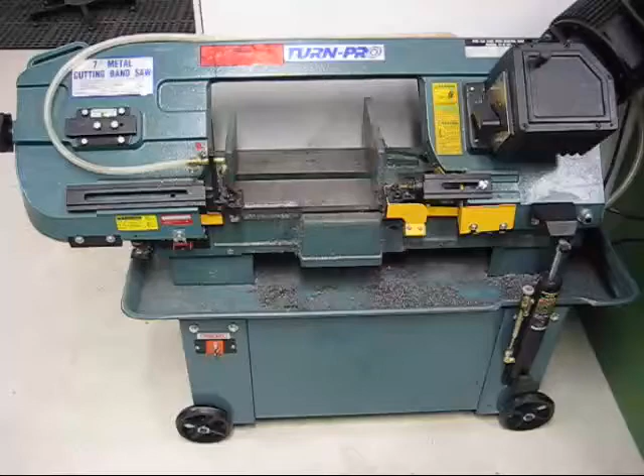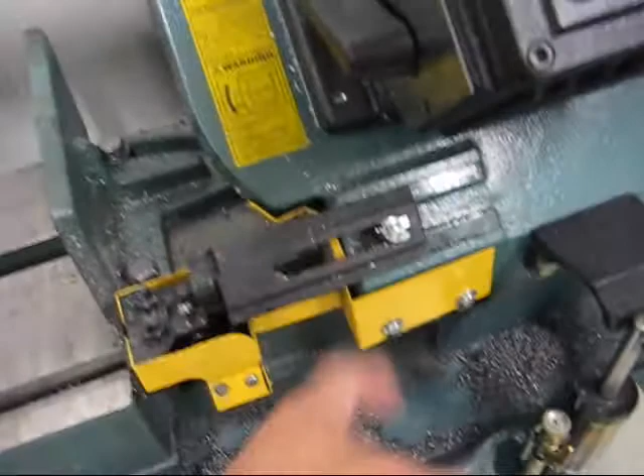Today's project is to repair this bandsaw. This hand wheel here tightens the adjustment on the cutting length. It's broken, it's just plastic.

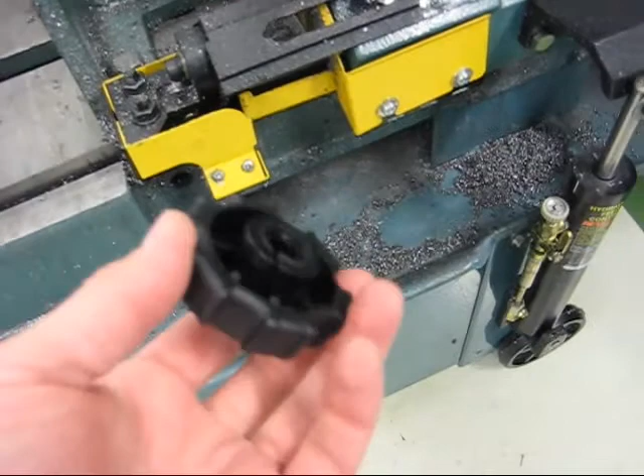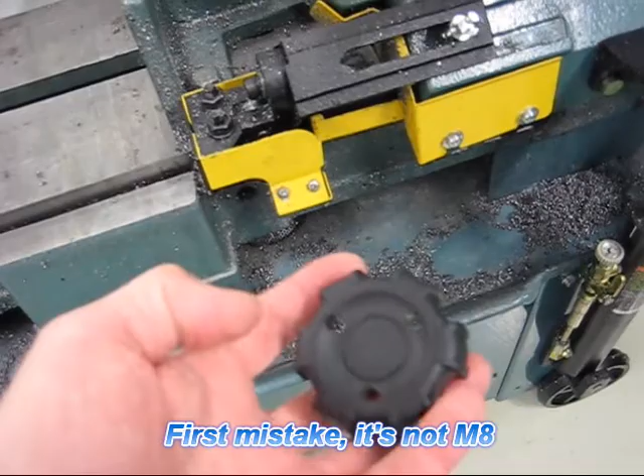I'll take another one off to measure it. So I'm going to make two new ones out of aluminium, and I'm going to use an M8 bolt socketed cap screw for it instead of making the threads and everything out of aluminium. I don't think that will hold up.

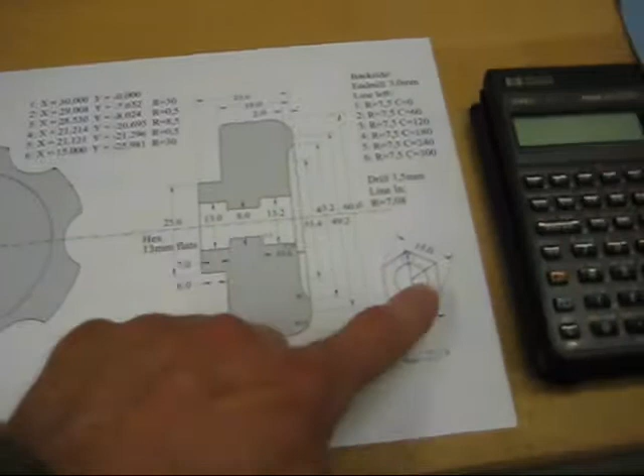I've made a little design here on how it's going to look. I'm going to mill a hex on the back side, where I'll insert a nut, then the socketed cap screw from this side, and I'll Loctite that onto the screw, hopefully it will stick.

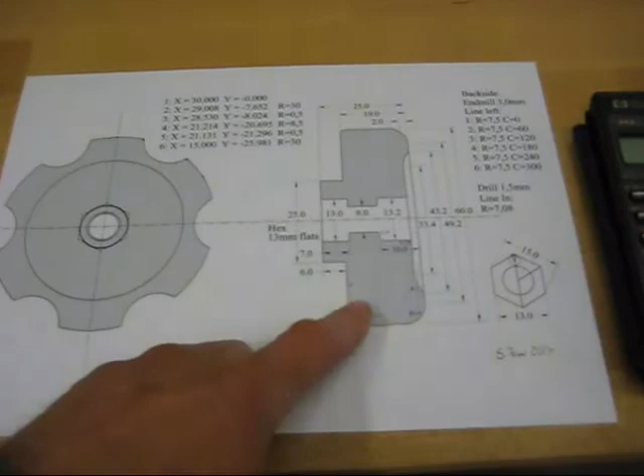I will turn that piece in the CNC machine, just because it will be faster, especially with these radiuses.

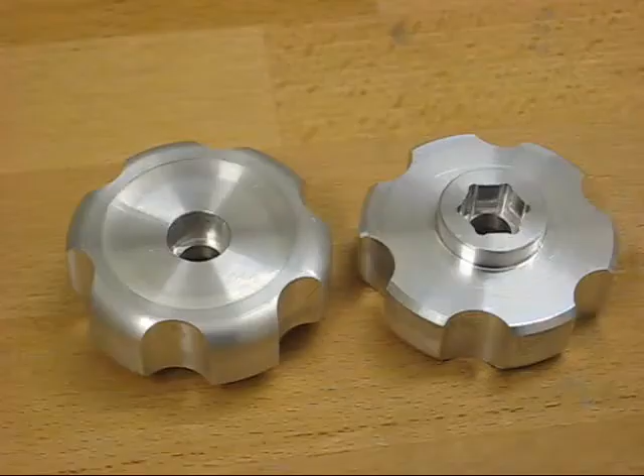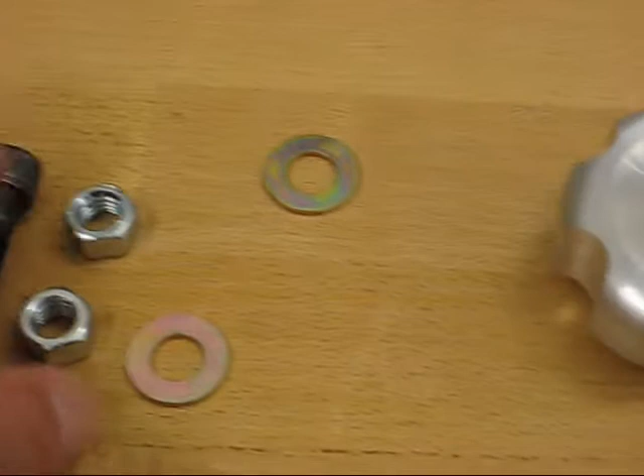So I finished machining these hand wheels. They have a hex on the back side for the nut. The bolt is 3/8-16, so it's just a matter of threading this bolt a little bit further up, and the project will be done.

It wasn't possible to make any usable video inside the CNC machine because of the coolant, but it was basically two operations. This is the first side. Face it, turn it, drill with a 10mm drill, then bore this recess and bore out there, and then use a 10mm or 8mm end mill to cut this.

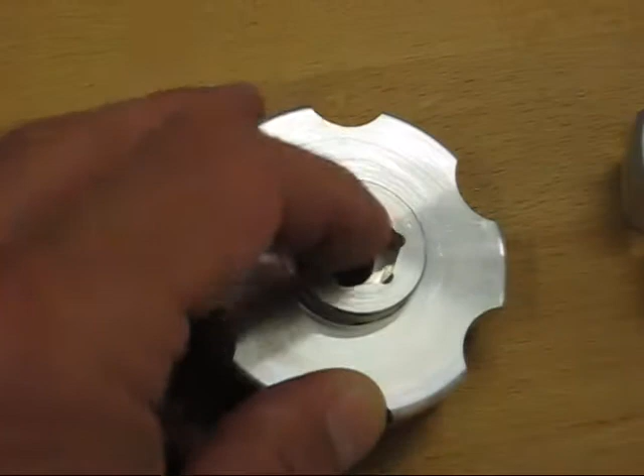Turn it around and face it there, face there, make the radius, then use a 3mm end mill to mill out the hex, and the same end mill just plunging down in the corners to get clearance for the nut.

So I only made one test piece and these two, so I guess I have it down now. Anyone who wants a pair can buy them for a reasonable amount.

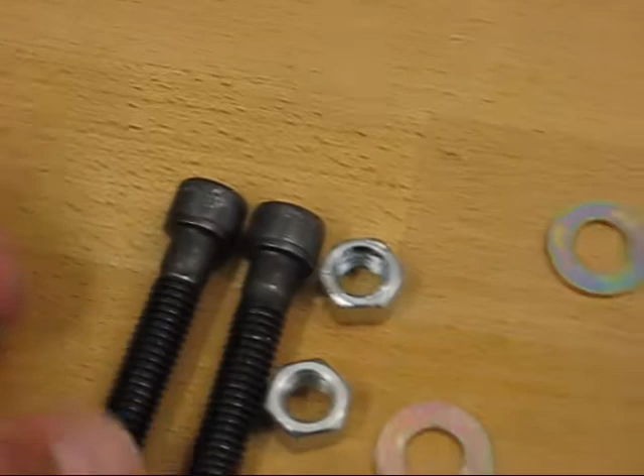So I'll get to the threading, see how it goes. This is how I'm threading it, just a normal die on a hex key.

Some Moly D there. The bolt is obviously looser tolerance or tighter - anyway, the bolt is bigger than the threads here, so it cuts all the way.

Oh, China crap! That was interesting. I wonder what that die holder was made of. Not so impressed.

I guess I'll have to thread them in another way. It's a lesson for us all - don't buy crap, buy proper tools.

I guess we won't finish those threads today. According to the seller, this is made in England, die. Maybe there's some little island or something in China where it's called England.

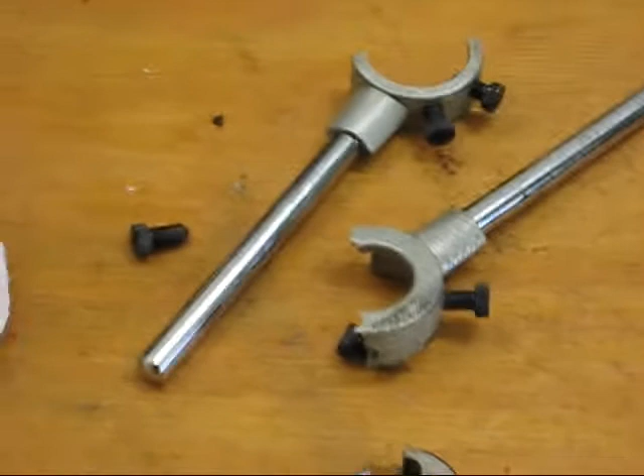For the record, I don't usually buy crap. This tap and die set here I bought maybe more than 15 years ago, and I barely used the die holder. I've used the taps, some of them, and they are crap too. But after that I've learned to buy proper tools. Or I guess not - I have learned to buy what I think is proper tools.

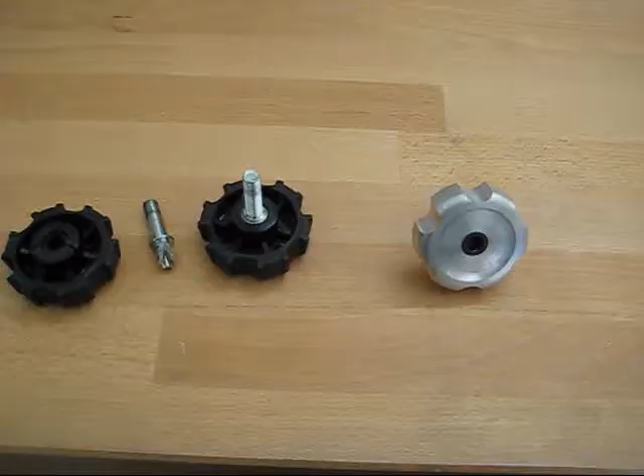After a little bit of threading on the pacemaker, these are completed. I already fitted one to the bandsaw. I'll put on the washer like that, and we can throw away the Chinese plastic. Mount this.

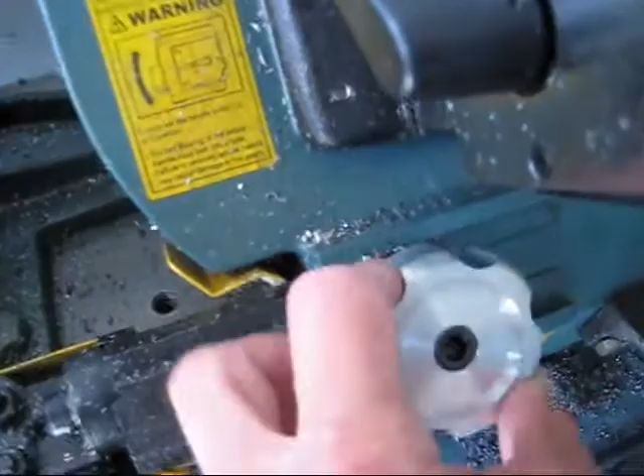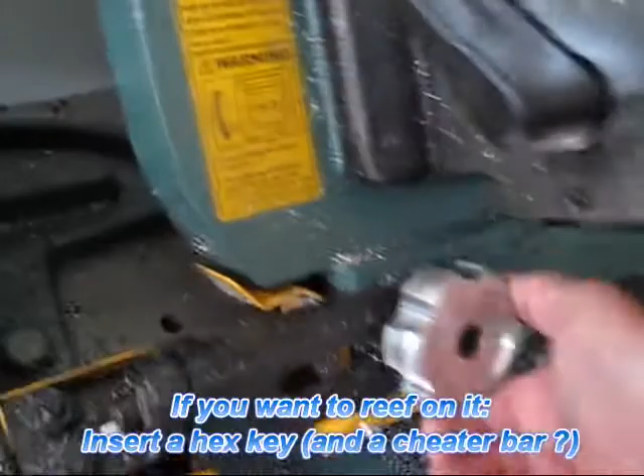It's the first one. Looks a little bit better and will last.